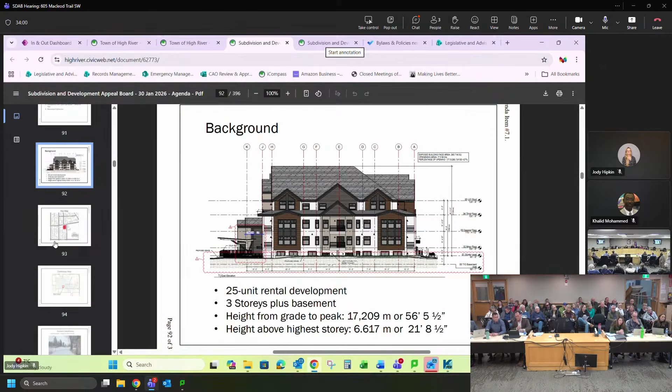In this case, the lowest level of this building is considered to be the basement, so it is only considered a 3-story building. It qualifies as a basement only because it extends slightly further below grade at 5 feet 5 inches, as opposed to its extent above grade, which is just 5 feet. Next slide.

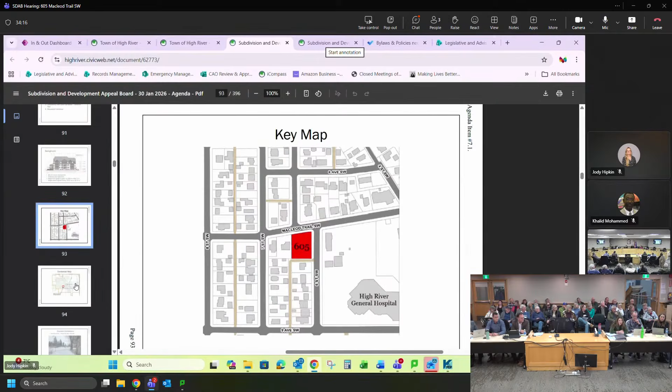This is a key map of the subject property. It is on the corner of Macleod Trail Southwest and 6th Street Southwest, and the property is approximately 0.117 hectares in size. Next slide.

The property is currently vacant. There was a house on the property previously; it has been moved. The house was discussed in the town's Residential Heritage Inventory Project 2, but it's important to note that it was never formally protected by bylaw.

Next slide. This slide shows the site conditions prior to the house removal. It contained a 2-story house with a detached garage, and it also had a crescent driveway onto both Macleod Trail Southwest and 6th Street Southwest, as well as the laneway. Next slide, please.

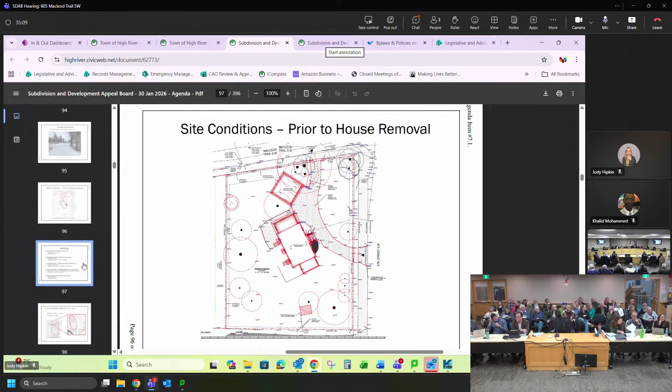As previously discussed in my presentation, the appellant requested several variances to the applicable land use bylaw requirements. Overall, the Development Authority does not support the proposal, as its massing, form, and overall design raised significant concerns about the development's ability to integrate with the surrounding neighborhood context.

The first variance for discussion in this presentation is the front yard setback, allowing the building to be 8.58 meters as opposed to somewhere between 2 meters and 6 meters from Macleod Trail Southwest.

The Development Authority had no concerns regarding this variance. The land use bylaw standard is 2 to 6 meters from the front property line. The reason for this is to encourage a strong relationship between the new building and the public realm. However, the town still believes this can be accomplished with the proposed courtyard, and the increased setback helps preserve the mature trees on the property, which the town believes is of value.

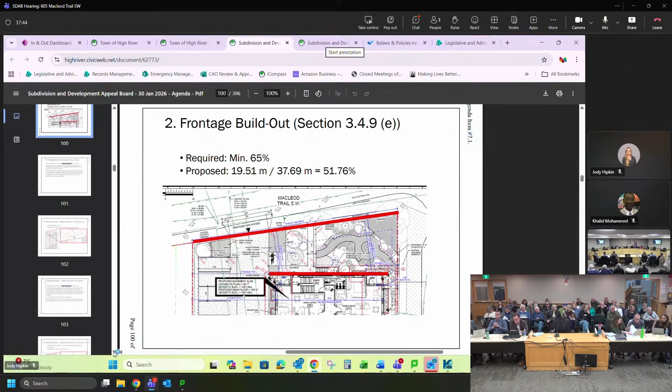The Development Authority does not support this variance. It is needed, in the Development Authority's view, to accommodate vehicle access off of Macleod Trail Southwest and associated parking and internal drive aisle, in addition to using the laneway. The Development Authority does not believe it is reasonable to compromise the pedestrian environment in this way to support vehicle access accommodating traffic generated by the proposed development, which the Development Authority believes to be excessive in massing.

The third variance concerns the width of the vehicle access from Macleod Trail. The original crescent-shaped driveway had a single-width access at this location. The developer is now proposing a 7.08 meter wide driveway to allow for two-way traffic, along with 1 meter flares on each side.

It is important to note that the flares are not part of this variance request. Under the land use bylaw, vehicle access width refers only to the width of the driveway on the private property. It does not include the portions within the public right-of-way, such as curb flares.

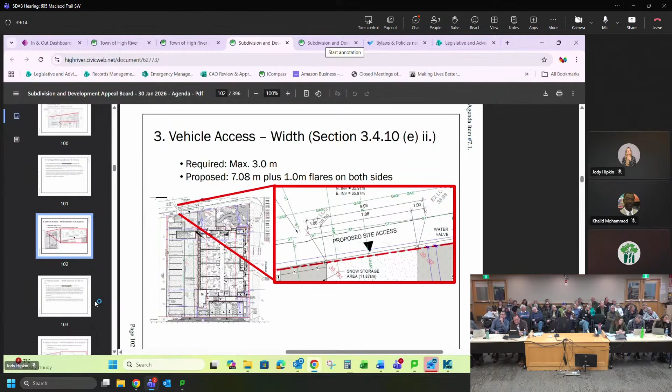The Development Authority does not support this variance. It again does not believe it is reasonable to compromise the pedestrian environment with a wider vehicle access over the sidewalk in this way to support traffic generated by the proposed development, which the Development Authority believes to be excessive in massing. It is important to note that there is a laneway, and the Development Authority believes that the development, at a more appropriate scale, could accommodate traffic through the laneway.

The fourth variance relates to the number of vehicle accesses. The developer is proposing a vehicle access off of Macleod Trail, which is in addition to the laneway, and a variance is required for this.

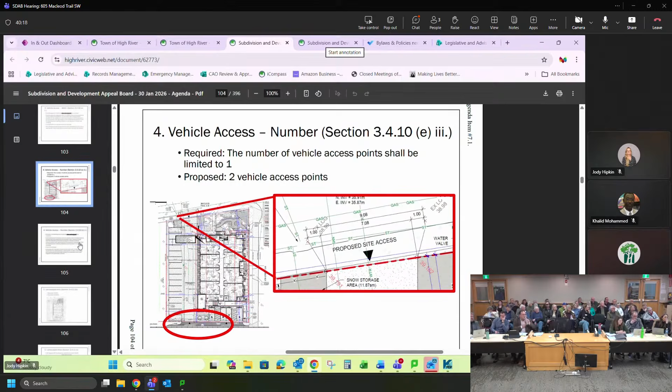The Development Authority does not support this variance. The site currently has 2 access points in addition to the laneway access, arranged as a crescent-shaped driveway. The appellant proposed to remove the existing 6th Street Southwest access entirely and relocate the Macleod Trail Southwest access further to the west, aligning it with the proposed parking area on the west side of the property.

The Development Authority does not believe it is reasonable to compromise the pedestrian environment with a vehicle access over the sidewalk in this way to accommodate traffic generated by a proposed development that the Development Authority believes to be excessive in scale and massing.

It is important to note, again, there is a laneway. Laneways are intended to serve as the only point of vehicular access for new developments, reducing the number of driveways and access points that are going onto public streets and sidewalks that would further fragment the pedestrian network.

This position upholds one of the Town of High River land use bylaw's two guiding principles, which is, and I quote, 'A pedestrian as a universal measure of design. The Town of High River is to be designed based on a scale that is comfortable to people, encourages walking, accommodates a variety of functions, can change and adapt over time, and will foster an environment that supports and reinforces the social aspects of the town.'

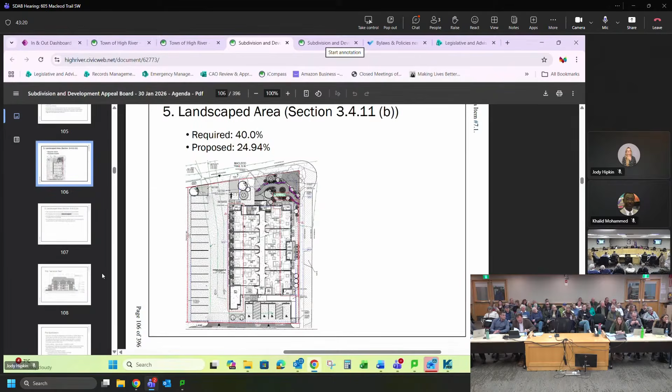In contrast, the developer is proposing only 24.94% of the site as landscaped area. The Development Authority does not support this variance. It is the town's understanding that the landscaped area reduction is largely driven by parking. The Development Authority does not believe that it is reasonable to compromise the 40% landscaped area requirement to facilitate a development that, in the Development Authority's view, is excessive in scale and massing.

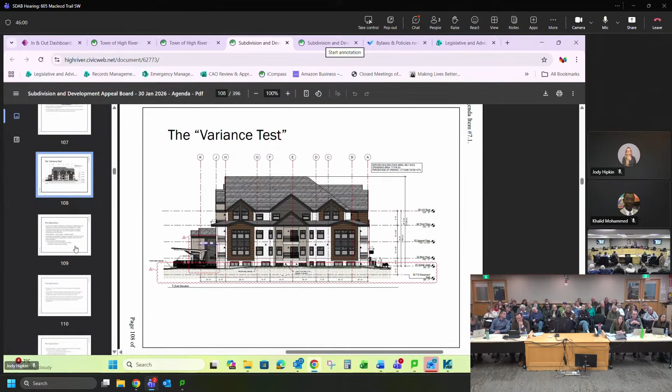The Development Authority was unable to support this application as presented, as it believes the variances were facilitating a design that would detract from the public realm and would materially interfere with the enjoyment of neighboring lots, particularly due to massing, as well as prioritizing car-centered elements over the actual requirements of the land use bylaw. Next slide, please.

The town met with the appellant on December 2nd, 2024, March 13th, 2025, April 3rd, 2025, June 25th, 2025, and September 4th, 2025, throughout the pre-application process. Throughout this process, the town's goal has been to support development that aligns with the land use bylaw, its guiding principles, and the town plan.

At the initial meeting on December 2nd, 2024, the appellant presented an early concept ranging from 12 to 14 units, but also indicated the possibility of increasing the density to as many as 24. Town administration reviewed all relevant land use bylaw requirements, and the applicant was to determine how they wished to proceed moving forward. At subsequent meetings in March and April, the appellant began to have more clarity that they would likely be applying for variances to land use bylaw standards.

The town confirmed that all variances would be examined using the town's two guiding principles, one of which is a pedestrian as a universal measure of design. The Town of High River is to be designed based on a scale that is comfortable to people, encourages walking, accommodates a variety of functions, can change and adapt over time, and will foster an environment that supports and reinforces the social aspects of the town.

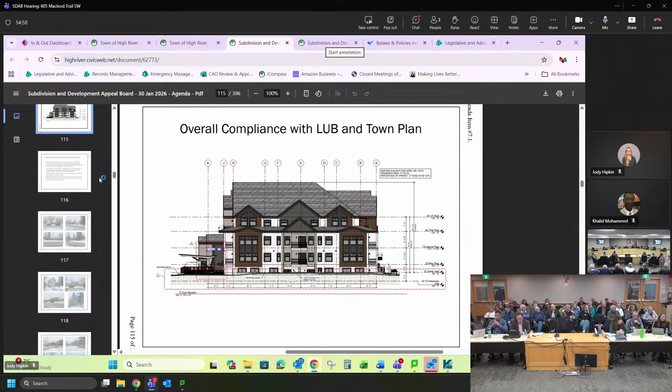The development authority does not believe that the proposed development meets section 1.1A.3 of the town plan, which requires that the town shall ensure the form and character of new developments respect and complement existing neighborhood character.

The purpose of this policy is to emphasize the importance of a cohesive, scaled streetscape, typically defined by compatible building heights, massing, and architectural styles. The proposed building, however, is noticeably taller and heavier in massing than its surroundings. This divergence disrupts the continuity and visual rhythm of the neighborhood and fails to respect or complement the existing character, as this Town of High River policy requires.

There are many 1- or 2-story single detached dwellings in the immediate area.

There are also some that are a bit bigger in massing. The house next door, for example, is 2 stories but a bit taller than most of the 2-story houses around that area. There's also a semi-detached dwelling being developed on 6th Street Southwest by the hospital, which is 2 stories plus a basement. And there are some apartment buildings with 2 stories fully above grade and 1 story partially below, partially above. There's also a 3-story historic building that has become a business.

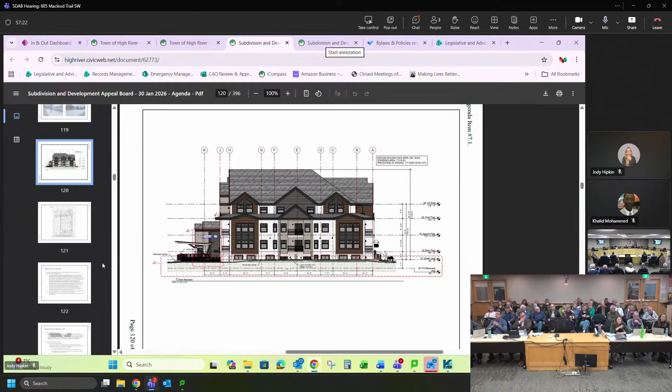The town understands that the appellant has provided 4 reasons for their appeal.

The development permit application required 4 variances from the development standards for the traditional neighborhood district. In its reasons for refusal, quoting from their appeal statement, the DA's rationale for not supporting the variances is, with respect to each variance, that the number of units for the development is excessive, in that the variances would not be required if the development had fewer than the 25 proposed residential units. They further say that density is not a development standard under the TND.

The second statement is that the DA failed to apply the proper variance test under section 3.4.20 of the land use bylaw, and that the appellant's position is these variances would have met the variance test under the land use bylaw if they meet the test for variances under section 687 3D of the Municipal Government Act.

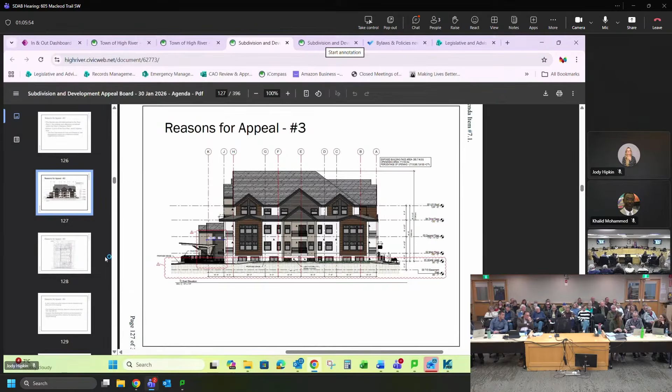Next slide. I think I'm off track again. Another slide—thank you, one more. Okay, while the area includes a variety of building types, the existing developments... is that number 3?

It doesn't matter. The existing developments, including larger buildings such as the Noble Tea House, demonstrate a built form that emphasizes architectural interest, human scale proportions, and thoughtful massing, achieving a balanced relationship between the structure, landscaping, and public realm, supported by an unfragmented pedestrian network that is not compromised by vehicle-oriented choices.

Are we on slide 4? This is the next one. Okay.

Features such as fully compliant landscaped areas come with benefits such as reduced heat island impacts, enjoyment for residents, and unfragmented pedestrian connections, all contributing to a development pattern that prioritizes the pedestrian experience rather than vehicle-oriented design choices. Now that the parcel is a vacant site, it should be treated as a greenfield opportunity, where compliance with the land use bylaw and alignment with current standards are expected. In the view of the Development Authority, the proposal's excessive massing, combined with a site design that prioritizes parking at the expense of landscaping, would detract from the public realm and would affect the enjoyment of the neighboring lots.

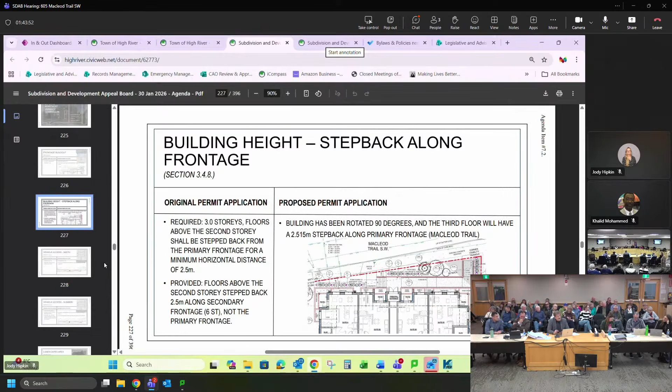Okay, the third point is the vehicle access width, the driveway width. In the original scheme, we proposed a slightly wider vehicle access than the land use bylaw permits, based on a practical operational consideration typical of multi-unit residential buildings.

A modest increase in driveway width can improve day-to-day functionality by accommodating passenger drop-off, deliveries, waste and recycling movements, and winter conditions, providing a more forgiving maneuvering environment for residents and service vehicles. In our view, that variance would have remained consistent with the MGA 6873D because it would not unduly interfere with neighborhood amenities nor materially affect adjacent parcels. Its impact is localized to this site's operations and would not change the use, intensity, or general character of the development.

The present non-variant design has a width of 3 meters, which is 10 feet. You could see it was very practical to suggest that perhaps 6 meters wide would be a more reasonable contemplation. That said, in the interest of full bylaw alignment and to reduce any potential interface with the primary street frontage...

The design has been revised to eliminate vehicular access from Macleod Trail entirely. A single 3 meter wide access is now provided from the rear lane exactly as prescribed, bringing the project into full compliance. While 3 meters is at the lower end of what we would typically recommend for a multi-unit project, the compliant configuration has been carefully organized to still function safely and predictably, with site circulation designed to minimize conflict points and keep vehicle movements away from the primary pedestrian frontage. So we concede it is still going to be functional, even though it's a little less than recommended.

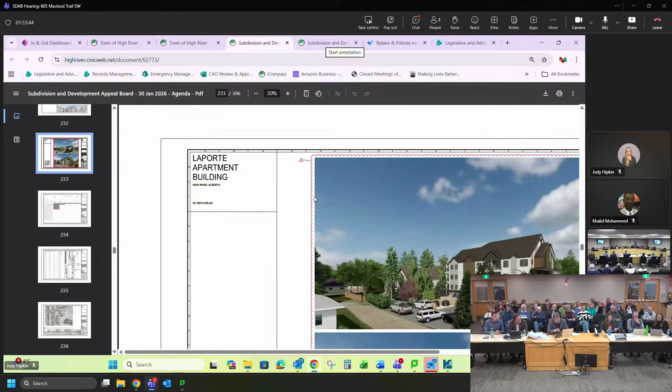In closing, this project has been deliberately and carefully designed from the very first instance. The submission reflects two clear and responsible pathways for the board's consideration: either the original scheme, which we believe satisfies the MGA 687 3D variance test, or the revised no-variance alternative, which removes all variances and is fully compliant with the Town of High River Land Use Bylaw.

Importantly, both schemes were developed with the same core objectives: a compatible, well-articulated residential building that avoids an imposing street presence, safe predictable vehicle circulation that reduces conflict along the primary frontage, a strengthened streetscape through compliant frontage build-out and step back, compliant landscaping, and fully screened waste management.

The alternative, fully compliant plan demonstrates that the project can meet the bylaw's technical requirements without compromising architectural quality or neighborhood fit. For these reasons, we respectfully request the board's support of the proposed development or confirmation of the compliant alternative. Our lawyer will explain that ultimately the test in some ways does not really apply to the permitted use application, and I'll let Bob speak to that. Thank you very much for hearing me, and if you have any questions, I'm happy to try to answer them.

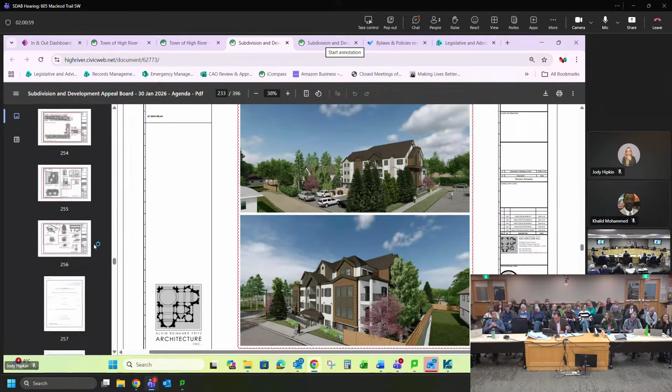Now, I'm not sure of the numbering, but I'd like to refer you to what I call my memorandum of argument. Looks like it's probably 250 thereabouts.

I'm going to refer specifically to paragraphs 22 and 23 in my memorandum. So the law governing permitted use DP applications. First, I will quote the land use bylaw, the town's land use bylaw definition of a permitted use. It says a permitted use means a use of land or of a building which is listed as permitted in a land use district for which a development permit must be issued with or without conditions by the development authority.

If the proposed development meets all the requirements of this bylaw. That is a variation of what in 642 sub 1 of the MGA describes what the powers of an approving authority has with respect to a permitted use application.

So 642 sub 1 of the MGA reads as follows: when a person applies for a development permit in respect of a development provided for by a land use bylaw pursuant to section 640 sub 2 sub B sub I, which is a permitted use, the development authority must, if the application otherwise conforms to the land use bylaw and is complete in accordance with 683.1 of the MGA, issue a development permit with or without conditions as provided for in the land use bylaw.

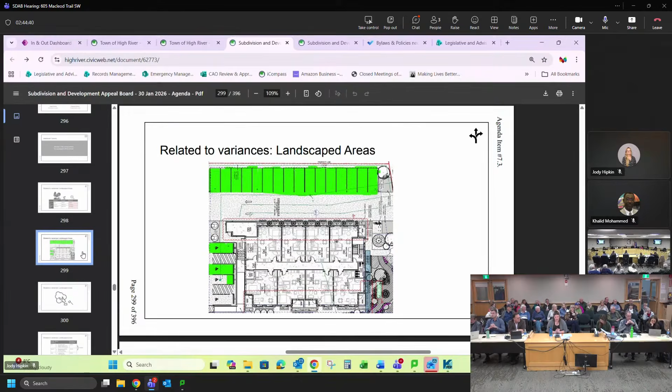As stated in the refusal document, well-designed landscaping enhances the form, character, and identity of a development, provides shade, mitigates the urban heat island effect, and supports natural drainage by reducing impervious surfaces, among other benefits. Also, please note that the property is in a flood zone, and the 800 block of 6th Street Southwest does not have underground rainwater drainage. Natural drainage is important. Next slide.

The proposal directly contradicts the town plan and the land use bylaws mandate on tree preservation, which states mature trees should only be removed for essential construction. The definition of what High River deems as essential construction is not defined, but various Canadian sources state these areas as healthcare sector, electricity generation, education, public safety, critical infrastructure, and residential construction, with the caveat that any residential construction already begun is permitted to continue. Construction has not been approved nor begun.

This development seeks to remove nearly all of the 20-plus mature trees and vegetation on site, replacing them with narrow vertical species like columnar aspen and lodgepole pine. These replacements fail to contribute to the town's urban forest canopy goals and do not provide the shade or aesthetic character required to maintain the small town feel, as outlined in Goal 1 of the town plan.

Several citizens have also noted that the root system of the foliage deemed to stay would have significant ground disturbance, with a high potential to impact root systems, ultimately killing the trees. Next slide.

The proposal also fails to meet the town's sustainability and community health objectives. Despite mandates for drought-tolerant landscaping, 94.96% of the proposed plants are indicated to be low or medium drought tolerance foliage, risking increased municipal water consumption. While the proposal has drought-tolerant plants, they only account for 5.04% of the plants. Next slide.